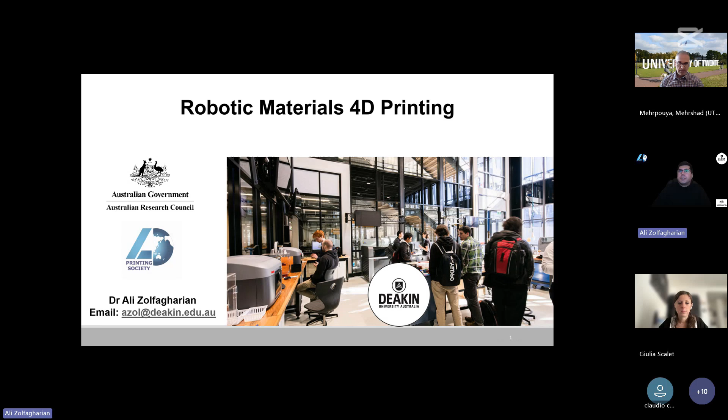In the picture, you can see our additive manufacturing lab. A bit of information about Deakin University, which is located west of Melbourne, with campuses at Warrnambool, further on the western part of Victoria, and also Waterfront in Geelong. We have recently opened our engineering school in Burwood, on the east of Melbourne, all in Victoria State, in southeast Australia.

Let me start with a brief definition of 4D printing. We define 4D printing as additive manufacturing of smart materials which change their shapes, properties, or even color in response to external stimuli such as heat, humidity, electricity, or magnetic field.

Using that, we can save more time, energy, and post-processing, coming up with robots, actuators, or sensors that could be manufactured using additive manufacturing with the intention to be run in one step.

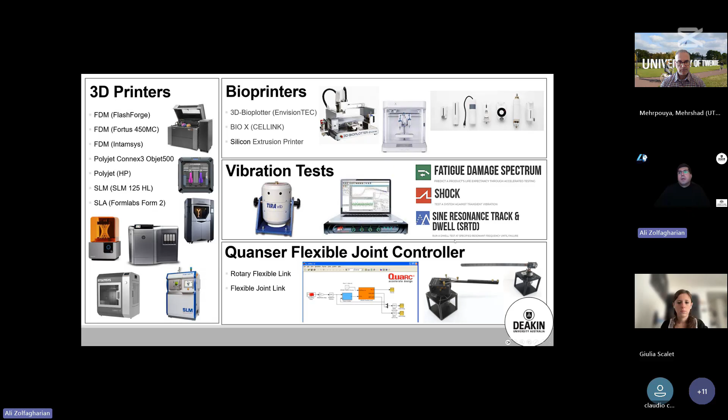In our lab, we have equipment related to 3D printing and bioprinting, and characterization in terms of 4D printing and soft robotics. You can see here a range of printers, mainly for polymers and bioprinting that I work with in my lab, and also equipment for vibration tests, characterization, and soft robotics using the Quanser and MATLAB interfaces.

Not far from the first day that 4D printing was introduced by Skylar Tibbits, the first paper on that was published by Jerry Qi at Georgia University, and also Skylar from MIT with his TED Talk.

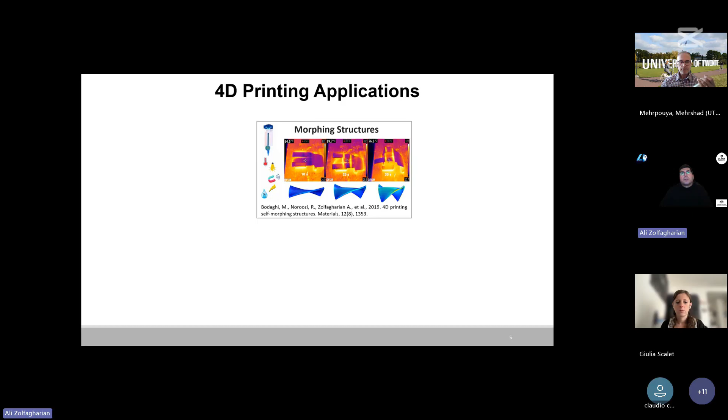In 2016, I started working on 4D printing in our lab with different applications, from morphing structures and structural elements, to applications in sports and medical devices, soft robotics, and very recently vibration absorption and isolation.

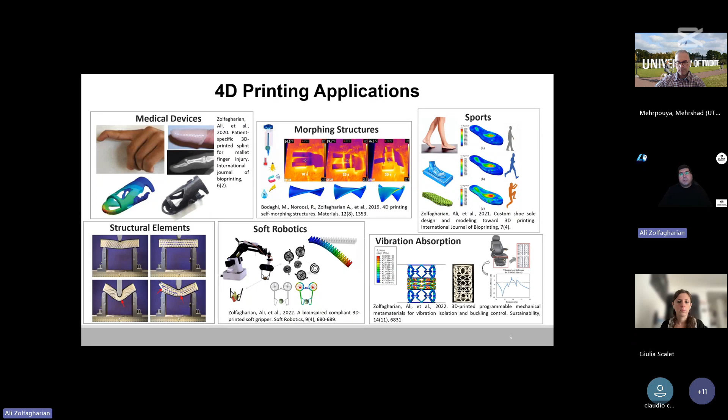From the beginning, with the collaboration of colleagues, we focused on how we can come up with the programming of the shape morphing that could be used for soft robotics and robotic applications using 4D printing.

A range of programming approaches have been introduced. For example, on the right is a pattern-driven 4D printing approach, where drawing or printing different patterns on a pre-strained polystyrene sheet, we could achieve bending and then control the bending using specific 3D printing parameters.

Then we came up with cold programming, where we use printing process parameters like the velocity and temperature of the nozzle and bed to print something, then apply the loading at room temperature or below the glass transition temperature (Tg), and then applying Tg, we could harness some sort of bending.

The most genuine approach we came up with for 4D printing programming is hot programming, where during manufacturing, using the printing process parameters, we could embed the amount of bending or morphing we could harness after printing by applying stimuli such as magnetic field, heat, or electricity to harness the bending.

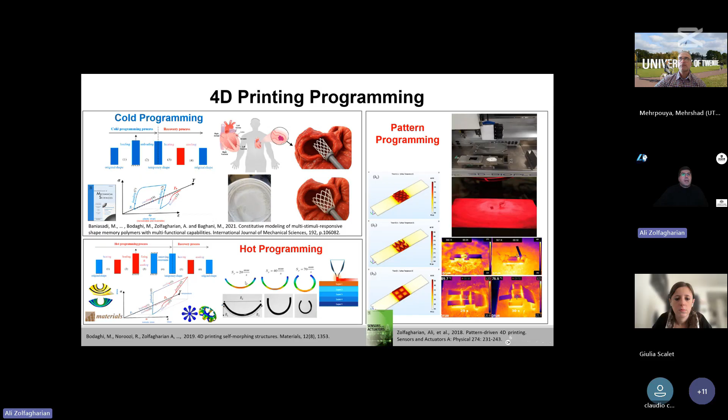For example, on the bottom image, using different velocities of the nozzle, we could come up with functionally graded materials, harnessing different amounts of bending after applying heat.

Coming up with these methods, we could work on different case studies and different projects related to 4D printing in the direction of soft actuators and soft robotics.

Another material that has some benefits for 4D printing is hydrogels, because they are processable and also stimuli responsive. They could be swelled and deswelled, and stimulated with different methods and stimulants like heat, humidity, electricity, and so on.

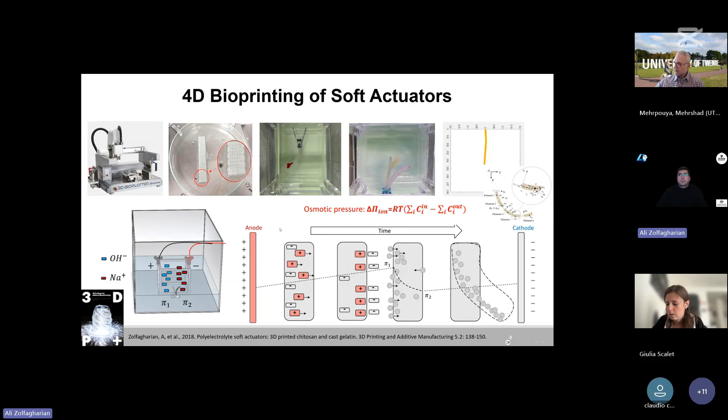We worked on polyelectrolyte hydrogels and developed some actuators based on osmotic pressure and the Donnan effect, where changing the polarity of the electricity changes the direction of actuation and controls the swelling and deswelling. They have some applications in biomedical cell manipulation and also as sensors in aquaculture and so on.

Further, we could come up with more sophisticated types of those actuators with the combination of both bioprinter and commercial FDM. We came up with a parallel robot that has more precise actuation and can carry more payload. We also included some fibers into the hydrogel during printing, and you could see morphing shapes like this saddle shape or this twisting morphing.

All these shapes can be achieved under the same volume of material or actuator using only 3D or 4D printing parameters, by changing the fiber direction either parallel or at different angles. We worked on the modeling of this morphing and showed the effects of fiber direction that could be achieved during 4D printing for hydrogel.

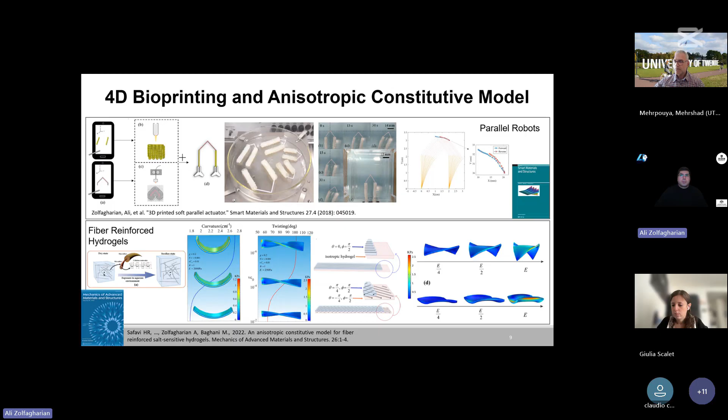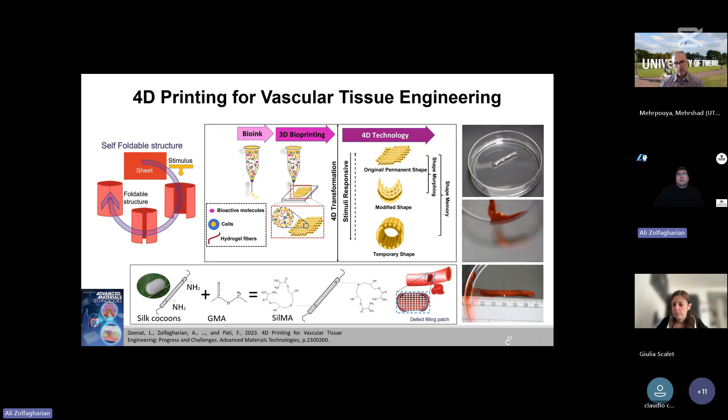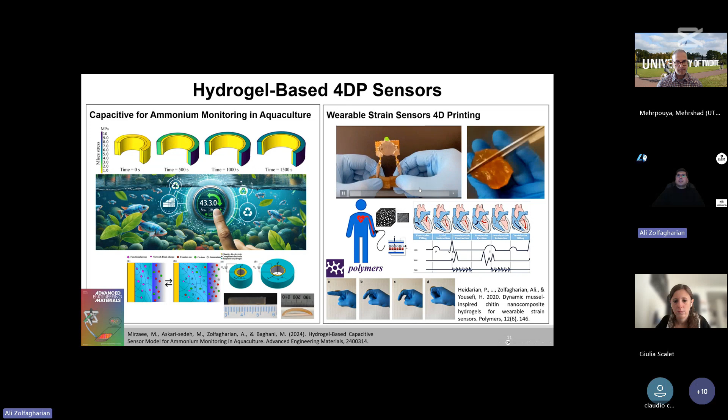We also worked on a wearable strain sensor with self-healing and conductivity, as you could see after cutting into pieces, where the pieces can come back to each other based on the self-healing characteristic of the hydrogels, with still high conductivity to be used as a sensor for biomedical application.

One of my main interests in 4D printing is soft robotics, combining materials and design using additive manufacturing, particularly 4D printing, for developing soft robots in one run.

Again, based on the programming methods I explained earlier, like code programming or shape programming, we succeeded in developing different types of grippers carrying different materials, payloads, and sizes, as you could see here in the soft robotic grippers.

Inspired by nature, we embedded a torsional spring as a hinge into that finger and soft gripper. We also worked on tremor suppression as another project of one of my PhD students, and we succeeded in suppressing vibration in the frequency range relevant to a person with Parkinson's disease. I will talk about that later.

Non-assembly mechanisms were also printed in one run using 3D printing for soft robotic applications.

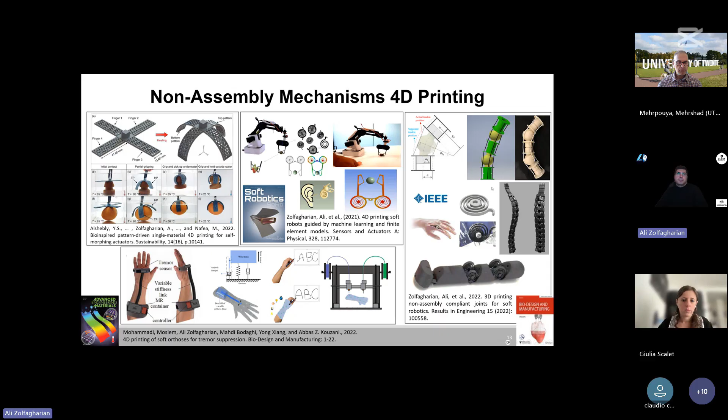Not all materials have the characteristic of being responsive to external stimuli, which makes 4D printing quite challenging. So we came up with the idea of heterogeneous 4D printing, where we brought in other stimuli-responsive materials or actuators like shape memory alloy or carbon fibers as an external part used for transferring heat, so we can use 4D printing programming in integration with those external actuators like shape memory alloy or flexible carbon fiber heaters.

We succeeded in showing their application as a flexible joint in soft robotic applications, for reducing the vibration of the endpoint of this flexible joint, as you can see in the picture, or as a gripper with variable stiffness using shape memory alloy.

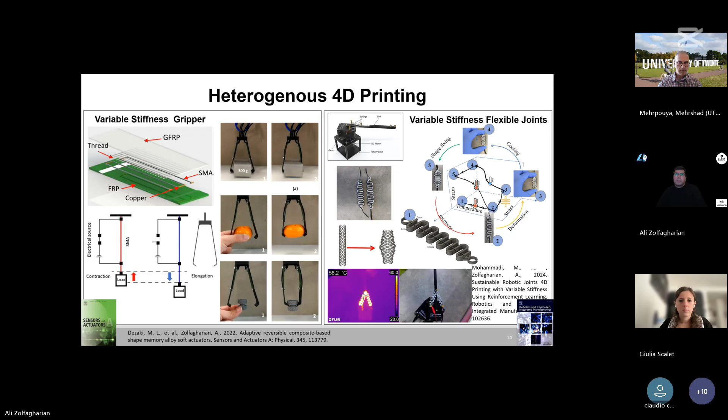Another direction of the 4D printing soft robotics is soft pneumatic actuators. This is one of the most well-known applications of 3D printing, and we could also call it 4D printing, because pressurized air or pneumatic stimuli can be used based on the design of the actuators that you conduct during printing. You can get a different amount of bending and force at the tip point of these actuators.

We have also used the design aspect of additive manufacturing and 3D printing that allows flexibility in the design and individualized design, which is an advantage of 3D printing. We could develop a personalized

spoon that we named Spoon 4PD. The 4PD is for Parkinson's disease patients. Based on measurements you could take from the hand and palm, specific to an individual, you could design a specific spoon relying on tuned mass damping. Tuned mass damping is a very popular direction for reducing vibration applications, and we used that for reducing the vibration at the endpoint of the spoon, based on the design we considered during 3D printing for this specific application for Parkinson's disease patients.

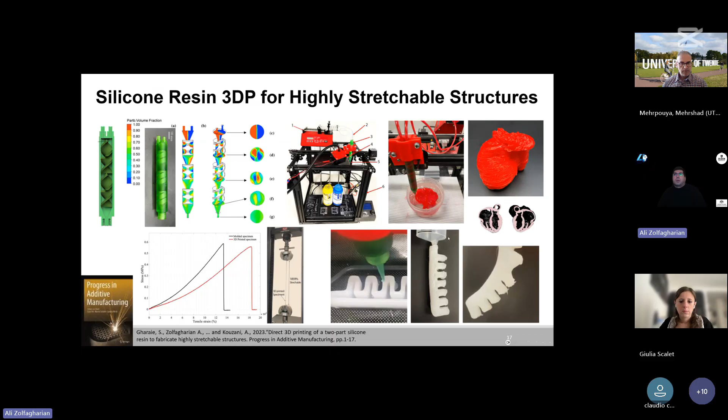We then printed using a syringe pump for that silicone printing, and we could develop soft materials and soft products for actuation, as well as some biomedical applications.

Using that silicone 3D printing, we could work on AI-based 4D printing for human-robot interaction. We developed different silicone modules in different shapes, and embedded sensors like accelerometers at different locations on those products. With different touches between the human and the modules, like slapping or tickling, using AI we could successfully distinguish between different interactions between human and robot.

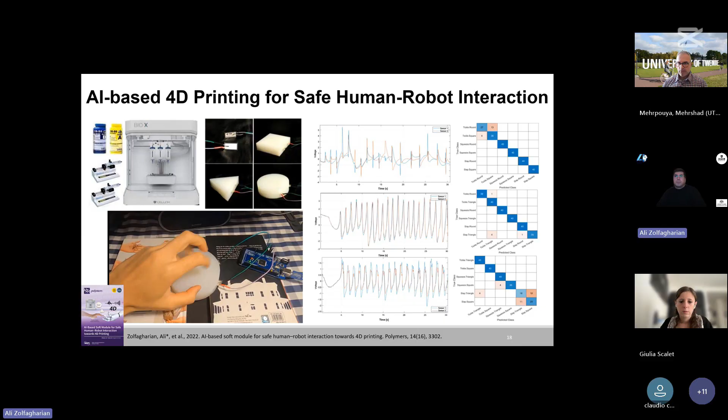Again, leveraging silicone, we mixed the silicone with ethanol, and the mixture of these two leads to some actuation upon heating, because the ethanol reaches its boiling temperature and evaporates, but its bubbles become entrapped in the silicone, leading to swelling after heating up once it reaches the boiling temperature.

So we used this characteristic and added a flexible fiber as a heater into the silicone, and printed that in a rotary printer, as you can see in the top left video. We then used them for vibration reduction, and for changing the stiffness of joints in robotic applications.

Further, we worked on a bistable mechanism inspired by the Venus flytrap plant, using the same material. We also showed the application of that in a parallel robot, as you can see in the top right video, showing how, using some string wrapping around the silicone, we could confine its motion to linear motion after expansion.

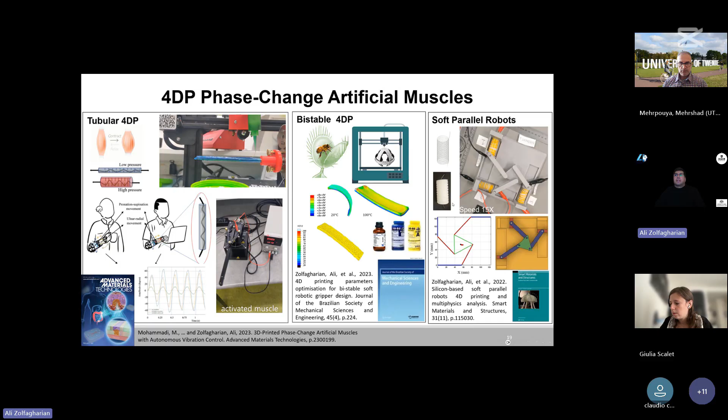Also recently in our lab, we started working on using bistable mechanisms that could be 3D printed, with applications in soft robotics, particularly for vibration. After trialing several designs, we could come up with designs that achieve bistability. One issue here was the boundary conditions, because of defects that occur during 3D printing, so we needed to come up with a very optimized way to 3D print this kind of bistable mechanism.

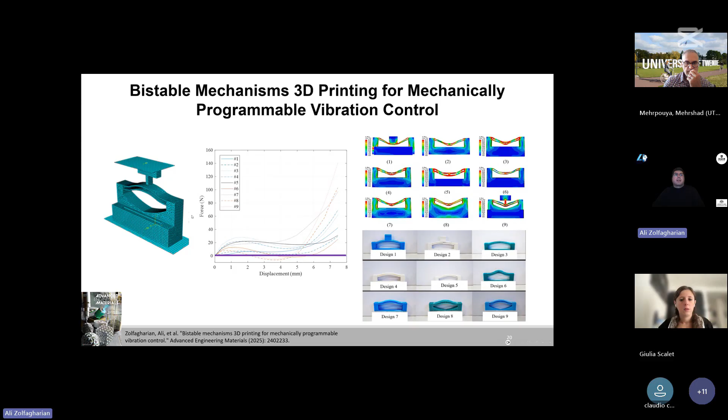A few of these designs achieved the bistability that was needed. We then showed the application of this bistability by stacking these bistable mechanisms into each other. As you can see, we could achieve the displacement that was needed, and by changing this displacement manually, it was not yet like a 4D system at this stage, but it has potential for 4D printing as a future direction.

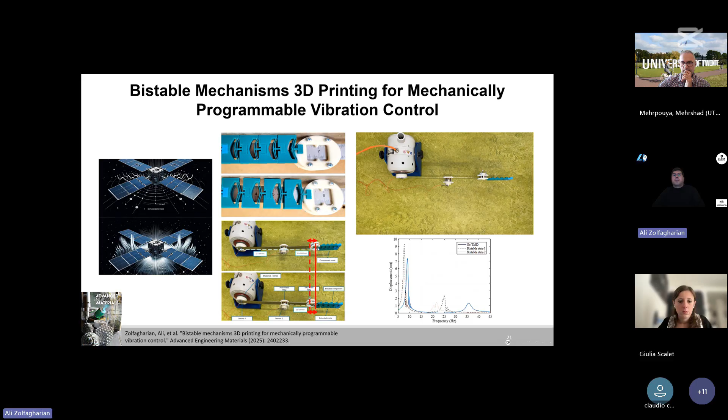The proof of concept was to show how we can reduce the amount of vibration by changing the location of the mass in some flexible structure, which could be a potential application of 4D printing.

We also worked with another PhD student on developing flexible materials that we named metamaterials, because we could achieve the desired force displacement by making a lattice of those materials, again inspired by nature, from this grasshopper type of mechanism we developed.

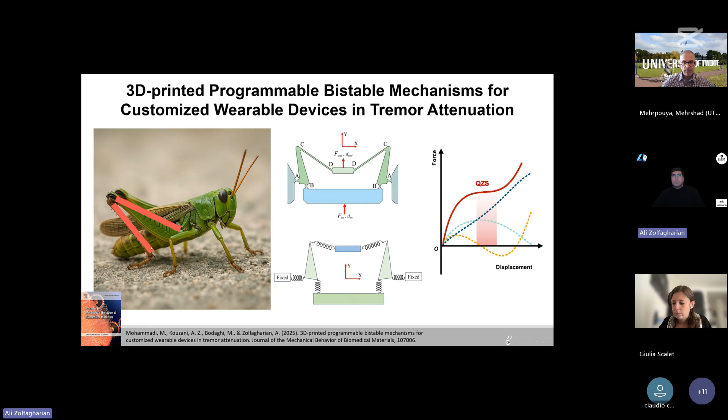And then using the lumped parameter approach, we were able to print and then model that.

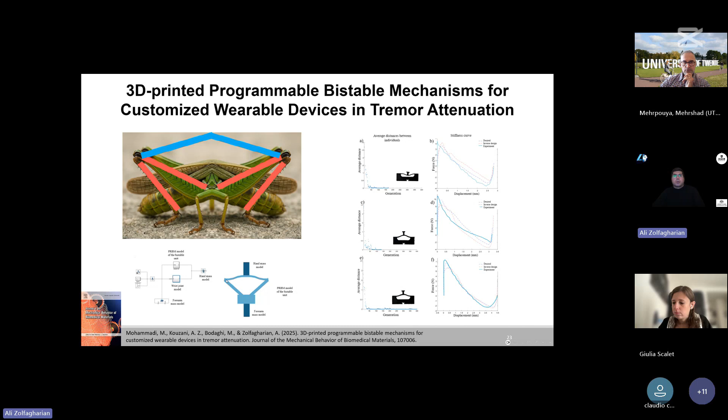Our main contribution to this work was developing this bistable mechanism in MATLAB based on pseudo-rigid body modeling, and then connecting those beam models and using springs to come up with this compliant mechanism.

And then we could use AI, artificial intelligence, particularly machine learning and surrogate neural networks, in order to estimate the behavior of the mechanism with changing design, using thousands or millions of data points we could achieve after validation with the experimental results.

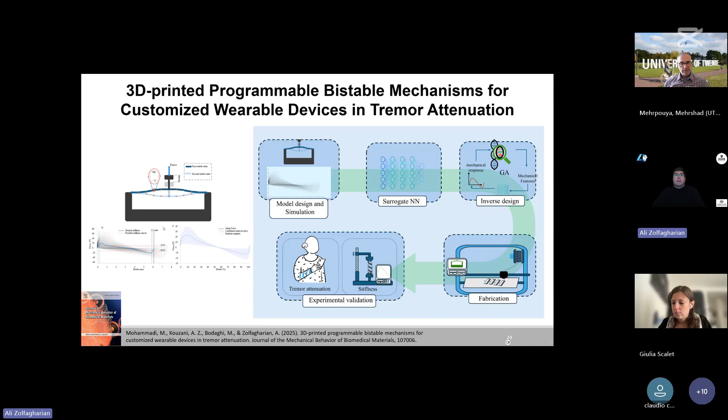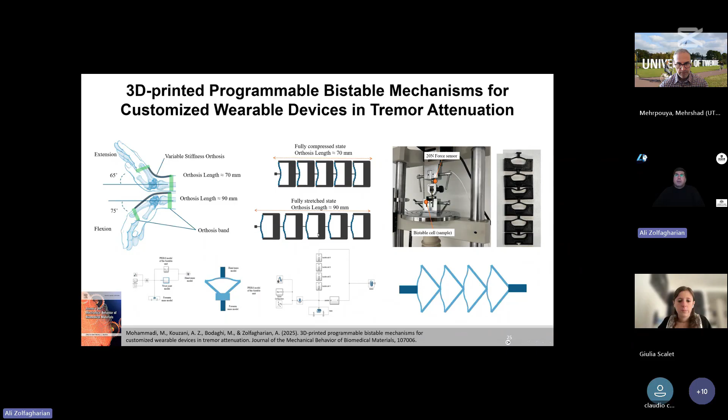That desirable stiffness then showed application in terms of vibration reduction, as you can see here in a phantom model of the hand.

We applied those bistable mechanisms, which were totally 3D printed, and we could achieve different amounts of stiffness by changing that bistability.

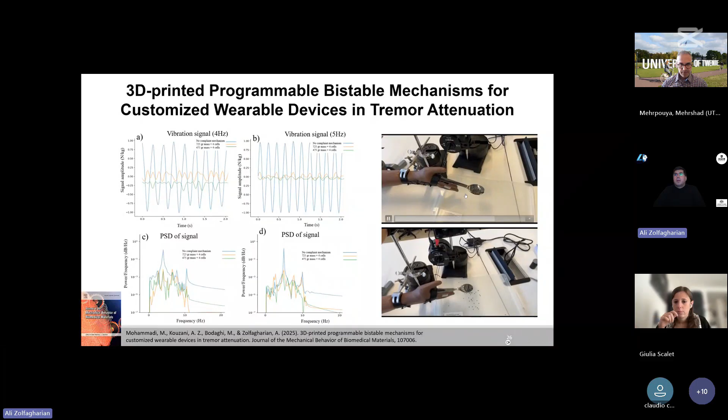You can see the difference: at the top, those spheres all remain in the spoon, but at the bottom, with changing stiffness, they are dropping, demonstrating the application of tremor suppression in Parkinson's disease patients.

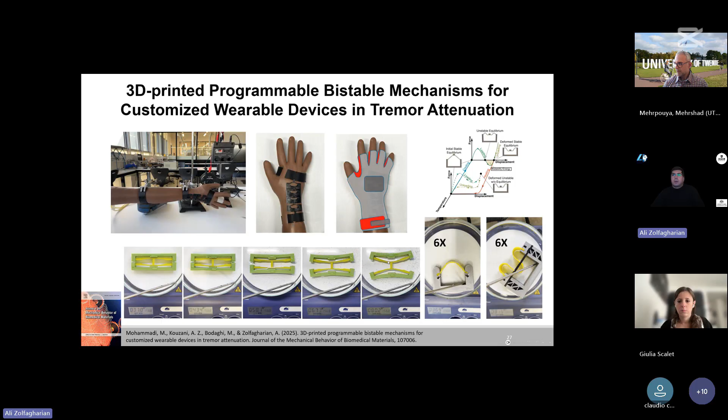We are also working on metamaterials inverse design using PENN, which stands for physically enhanced neural network. So we use physical simulation and models as a constraint or loss factor in the neural network or machine learning.

Using that, we have the advantage of reducing the amount of data needed for training the neural network, and we also capture the nonlinearity involved in the physical rules.

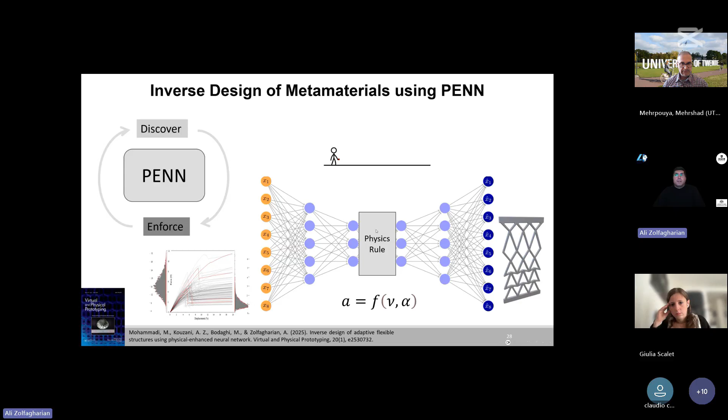And then we use some optimization in order to make a stochastic or searching algorithm for covering lots of possible scenarios for the force displacement.

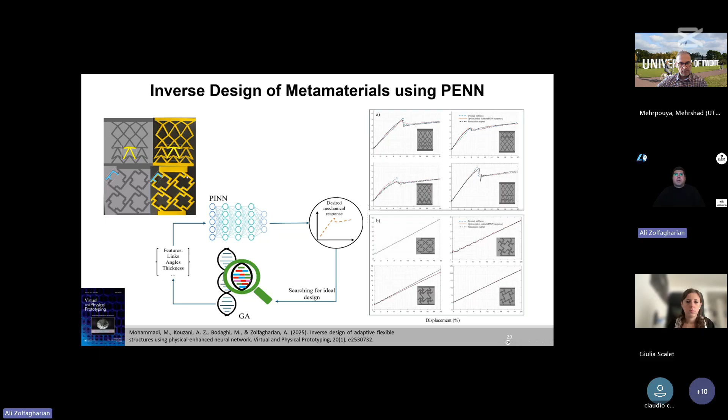And we could come up with several scenarios where we wanted the desired behavior of our metamaterials.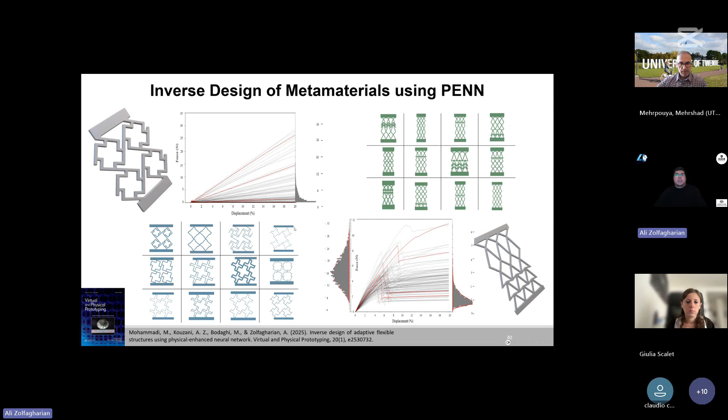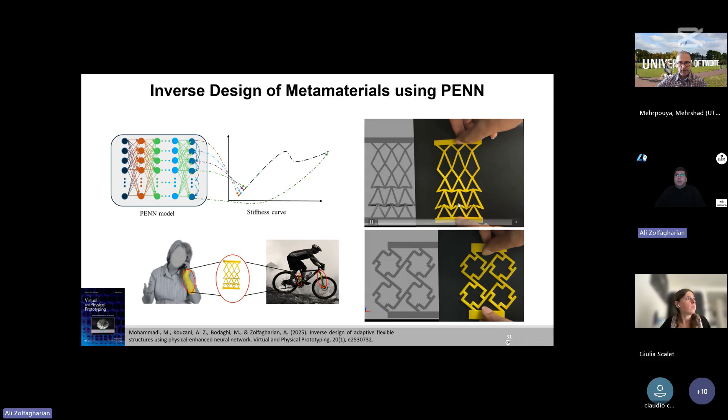As you can see here, from the inverse design, we input into our algorithm the desired performance or stiffness that we want, and we could come up with the final design based on the different stiffness and force displacement behavior that could be achieved. You can see that here in the video.

That was almost all that I had in terms of research.

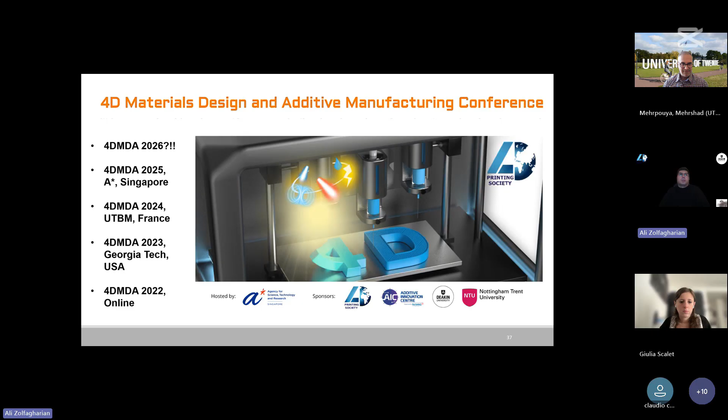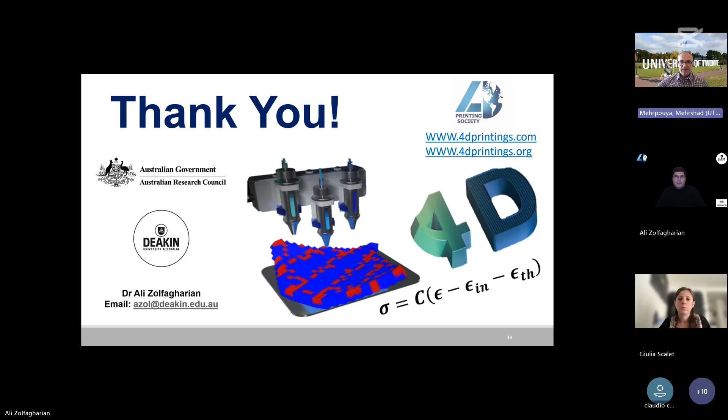Thank you very much, Ali. It was very interesting and, let's say, on time.

There are a couple of questions in the chat. I can read them for you. The first question from Maysam asks: what is the stiffness range of as-printed samples? How much do the structural defects affect performance?

Thanks, definitely. I don't remember the stiffness range, sorry for that, but I can come back to you or refer to the papers published there. But for the defects, I can assure you that they are very critical factors.

I think the question was related to bistability. For the bistable mechanism, there are the boundary condition and the force, and these are two very important things. The boundary condition will be directly affected by defects that could happen during printing, but this could be optimized.

Now we have also made progress in terms of the printer and materials we have. Compared to what we had like 3 years ago, now, for example, the Bambu printers coming are quite fast and quite good in terms of printing. So this all helps us move toward better results in terms of the bistability.

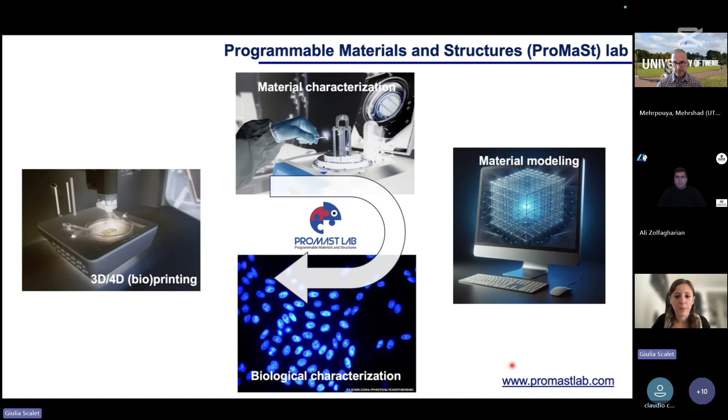So today I want to focus on programmable materials. As a brief introduction, what are programmable materials? They are materials that, as the name suggests, are really dynamic. They can be programmed in order to adapt to different situations and application needs. This is a very simple example of a thin sample that can adapt its form, its shape, to match different types of surfaces.

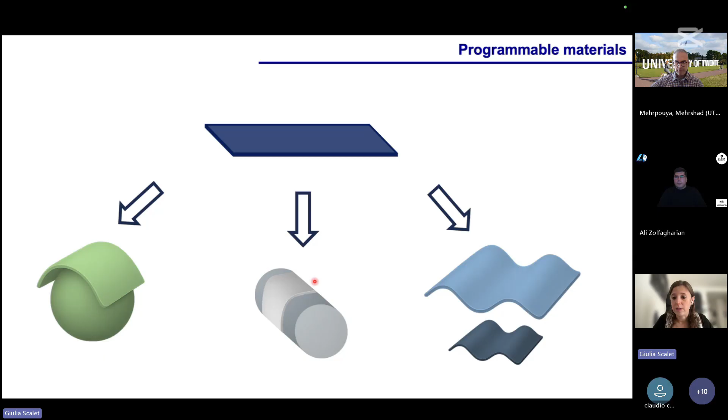Obviously this is just an example, but you can open your mind and program materials in order to adapt different physical properties and functionalities. In the literature you can find a lot of examples on shape programming, stiffness, Poisson ratio, color, adhesion properties. There is a lot of work in this sense, and obviously it depends on your needs.

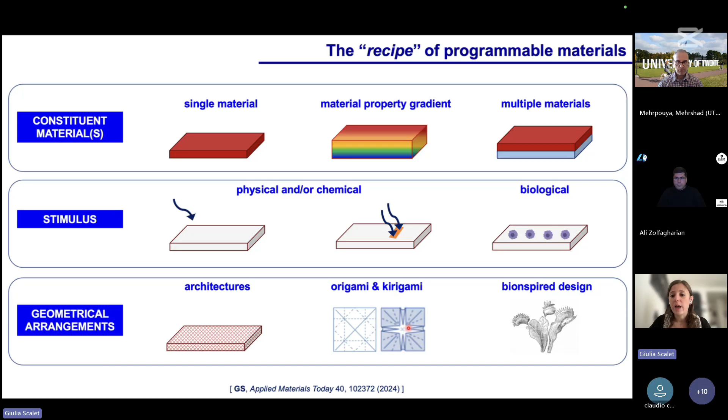To design a programmable material, there is a lot of work behind it. There are three main ingredients you can use to make a material programmable. You can play with the base materials, which can be different; the stimulus, so its application or the type of stimulus, which is not only mechanical but can also be thermal, magnetic, and so on; and also the architecture. You can play on specific geometries, such as the classical examples of metamaterials, origami, kirigami, or bio-inspired design.

So you have a lot of examples, and today I'm going to talk about a programmable system made of shape memory polymers. Shape memory polymers, as the name suggests, are soft materials able to remember their initial shape. Almost all polymers feature the so-called one-way shape memory effect. This is a very simple effect that can be schematically represented in this way: you start from an initial permanent shape, you apply a specific programming history to fix a temporary shape, and after the application of an external stimulus, you can recover the initial shape.

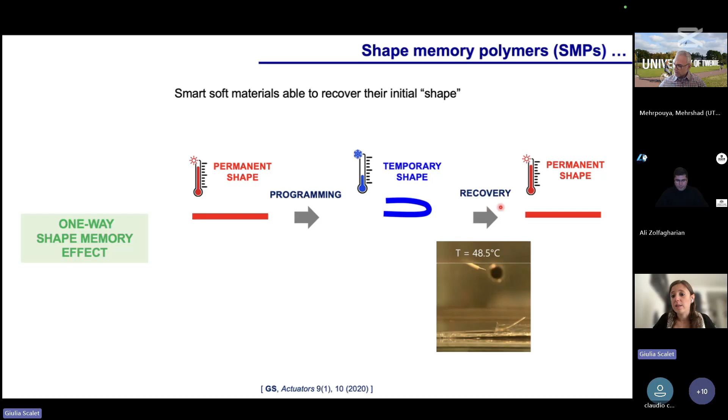As you can see in this picture, the thermal stimulus is the most used one. The only thing is that, as the name suggests, this is one-way, so you cannot go back to the temporary shape once the recovery is completed. This is why researchers work on other types of shape memory polymers.

There are polymers that can feature the multiple shape memory effect, where essentially the idea is very similar, but in this case you have more than one programming step where you can fix a different temporary shape, and after that the recovery is sequential. So you can program the different shapes to have programmable shape changes. Again, this is very important to achieve programmability, but again this is one-way. So once you have recovered the final shape, you cannot go back to the temporary shape, but you have to start again all the programming steps.

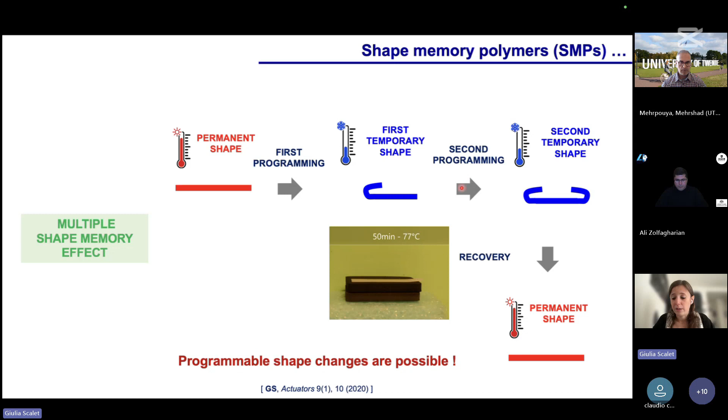This is why we are working a lot on the two-way shape memory effect. The idea here is to play with the cooling and heating cycle in order to move from one shape to another in a reversible way. So we have the additional feature of programmability and reversibility.

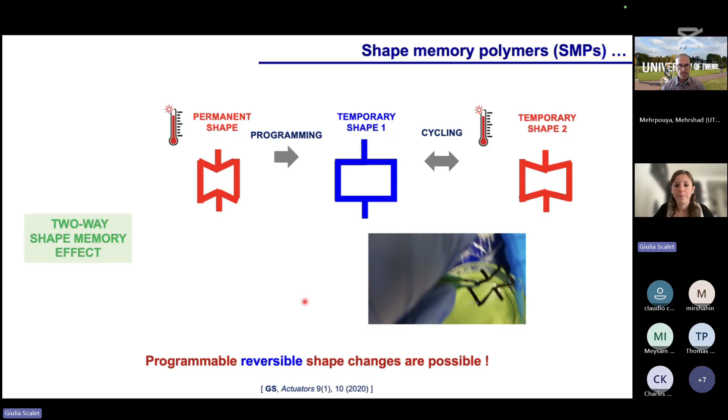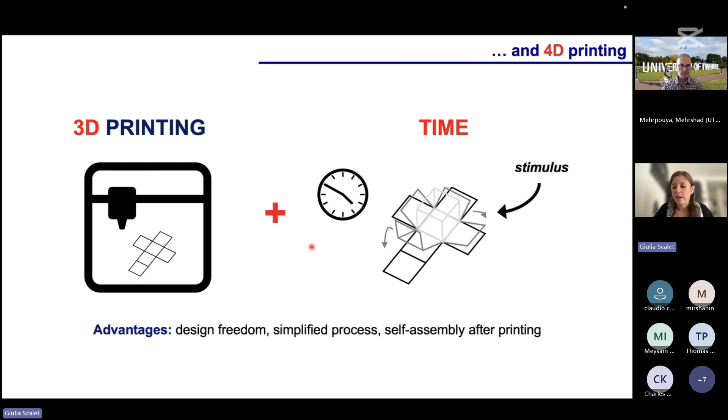These effects are very promising because you can couple the shape memory polymers with 4D printing approaches. I will not go into the detail and advantages of 4D printing, but this is very advantageous for applications. In fact, there are a lot of applications you can find in the current literature, and we also had an additional application that is very, very challenging: the use of this material for cancer engineering.

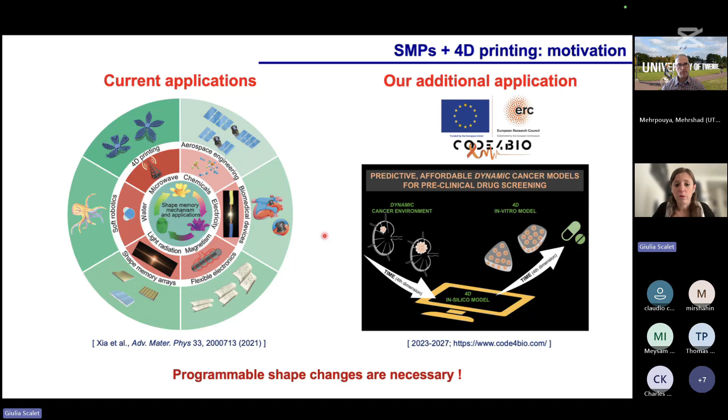We use this material as a scaffold in order to manufacture some dynamic in vitro models that can, in a simple way, mimic the real dynamicity and programmability of the tumor microenvironment. For all of these applications, programmability is essential. This is why we decided to work on this type of feature.

There are a lot of challenges behind this—experimental, from the practical point of view, theoretical, and numerical—because we have to find essentially the optimal polymer for our application, and this polymer is highly nonlinear, with a lot of phenomena behind to tune its behavior.

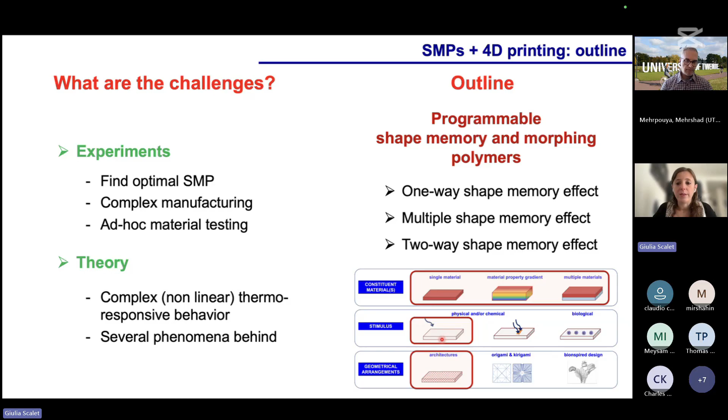In particular, today I want to talk about our recent results, focusing on the one-way, multiple-way, and two-way shape memory effects in order to achieve a programmable shape memory system. I will show you some results concerning these key ingredients, highlighted in the red boxes, in order to achieve programmability. So let's start just from the beginning, with a few words about shape memory polymers.

Again, the shape memory effect, as you have already understood, is the result of this programming history plus the recovery ability. Obviously, the architecture of the polymer plays a fundamental role because it can be synthesized to tune the response of the polymer based on your needs.

Essentially, we have a domain that is responsible for this effect, where there is a transition temperature—this can be a melting or a glass transition temperature—which is responsible for this behavior, and a net point, which can be physical or chemical cross-link, that is responsible for this shape memory fixity and recovery.

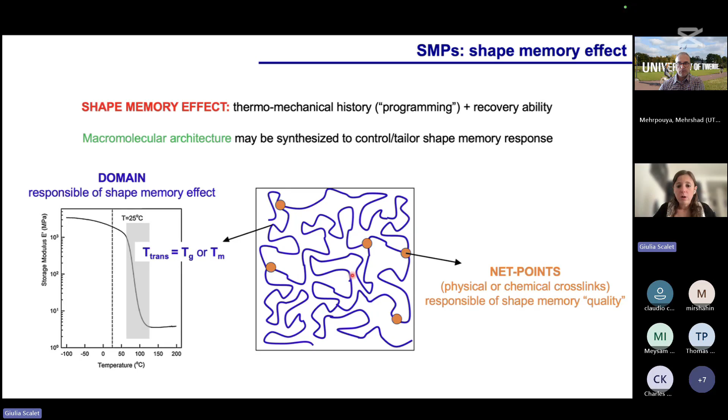So in particular, we have worked on different types of polymers. Let's start from those based on the glass transition temperature, and let's see how to obtain programmable shape changes using the one-way shape memory effect.

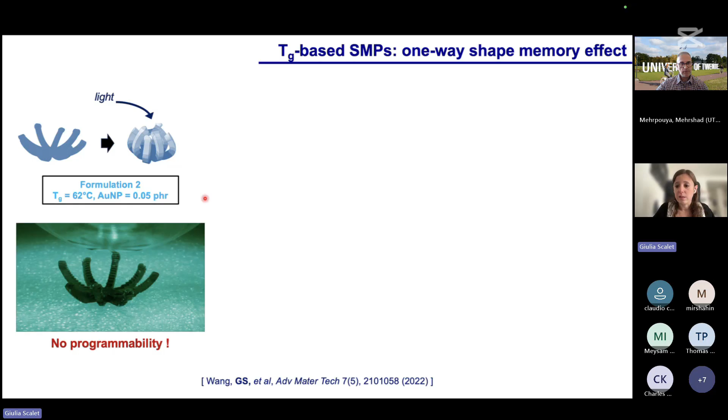As you have already understood, the basic one-way shape memory effect is not suitable for programmability. You can see this very simple example we worked on some years ago. You print this structure, fix this deformed temporary shape, and upon light irradiation, because the material is composed of gold nanoparticles, you can obtain through indirect heating the initial shape. So this is a very simple example, but it is not programmable. This is why we worked on programmability.

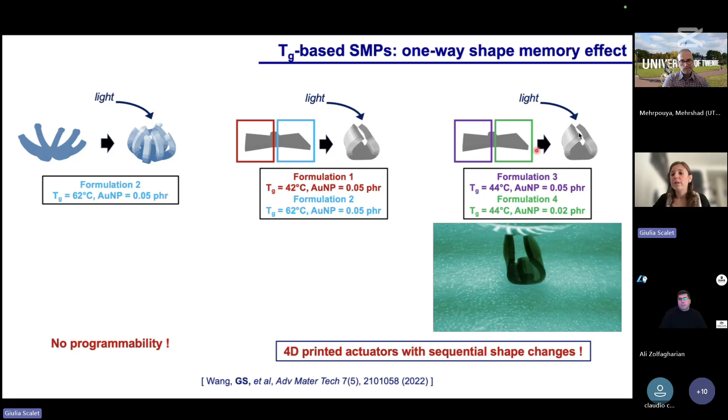You can also play with different polymers but with the same chemical composition, so the same glass transition temperature, but use a different content of gold nanoparticles in order to achieve differential heating upon light irradiation. This allows you to achieve sequential shape changes and sequential shape recovery upon light irradiation. So you have different approaches that you can exploit in order to achieve programmability also with the one-way shape memory effect. You can model this.

I'm a structural mechanics researcher, so this is my starting point from my PhD. We have worked a lot on constitutive modeling, and you can also propose constitutive models, in particular those based on phase transition, to describe and support this design stage.

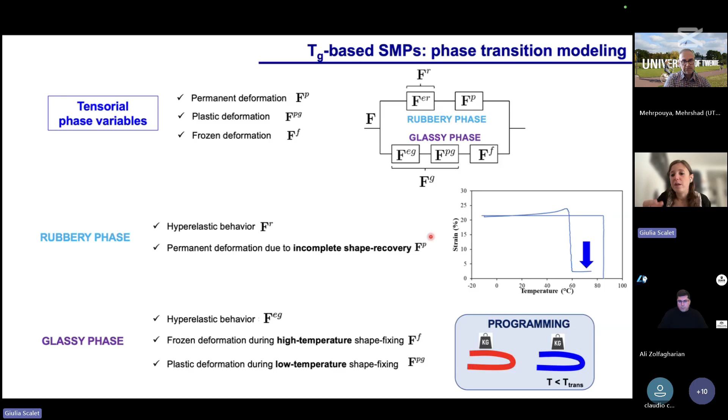The idea of this approach is to introduce particular specific phase variables, scalar or also tensorial, in order to describe all the inelastic effects and phases within the material, to describe the final shape memory behavior of the structure. I will not enter into detail of all the equations. In this case, we have a rubbery and a glassy phase, since the polymer is based on a glass transition, and you can introduce a specific tensorial phase variable to describe all the inelastic deformation associated with the different shape memory effects. You can obtain a model, in this case, that is able to describe different effects, not only the basic one, but also an incomplete shape memory behavior.

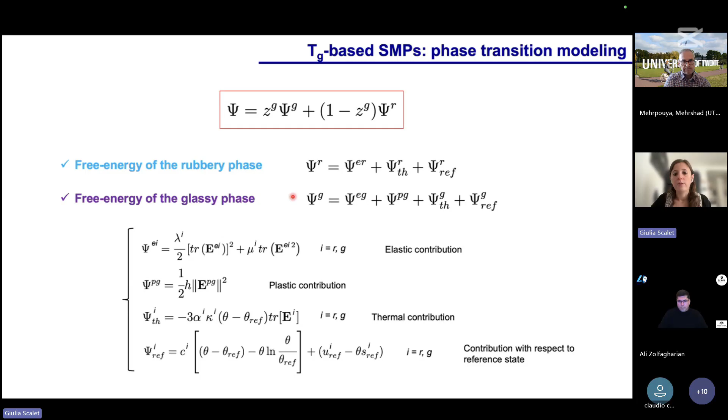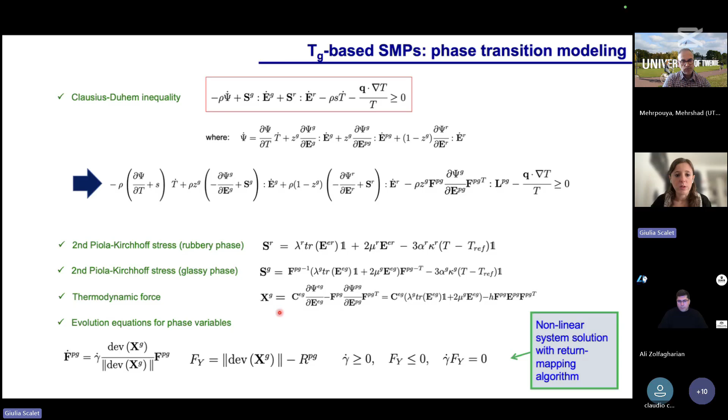So you can define the Helmholtz free energy as classically done in the literature with a mixture rule, and you can derive, in a thermodynamically consistent framework, all the constitutive equations. You can implement this into a numerical code. We did it in Abaqus software, and you can support the prediction of the behavior of this structure by numerical simulation, and the comparison shows very good results.

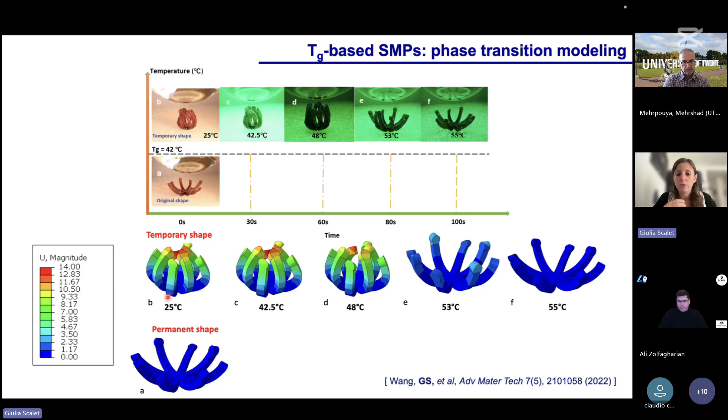The main problem we face with, for example, this structure, but also other structures, is that you start from a permanent shape and have to deform the structure to a temporary shape. So you have to apply, first of all, a mechanical deformation under isothermal condition at the beginning. This is the first step of the programming step. This is challenging from the numerical point of view because you don't know a priori the boundary condition to apply in order to get the right target temporary shape.

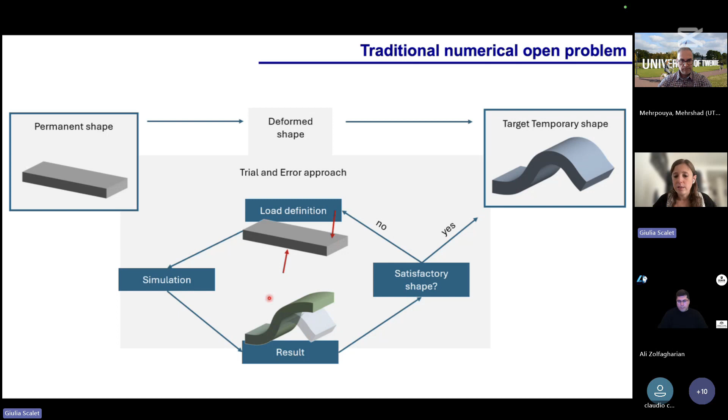So it is essentially a sort of trial and error approach for the numerical simulation, because you start to apply a load, a boundary condition value, but at the end it could not be the right one, so you have to change it a lot. This is especially true for very complex structures.

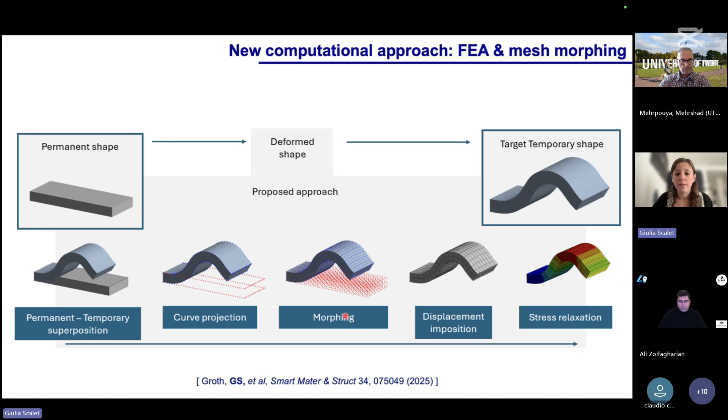This is why we try to support this step by coupling finite element simulation, with our constitutive model, with mesh morphing. Mesh morphing helps us skip this trial and error approach and achieve the target temporary shape, which should usually be known based on imaging techniques, or if you have a target application, you know your target shape, and you can apply this mesh morphing technique to avoid the trial and error approach based on finite elements.

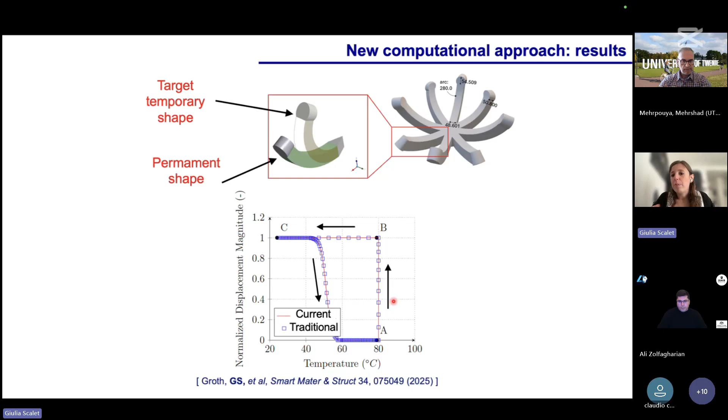And we validated this also for the case of this flower, and the results show good accuracy compared to the traditional approach.

And now let's go to the second part. Let's try to understand how to make a programmable structure using the multiple shape memory effect.

We did it using a commercial polymer. I'm honest, we were very lucky because we found this multiple shape memory effect in a commercial resin for the 3D printer by Formlabs, the stereolithography one. This resin is very advantageous because it has a broad glass transition temperature that is a prerequisite for the so-called temperature memory effect.

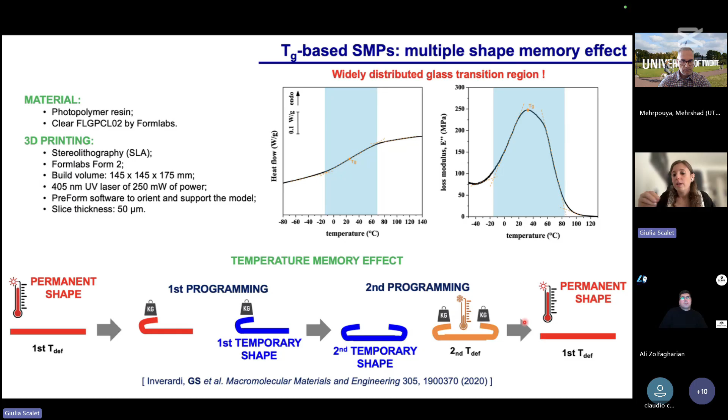What is this effect? It's very similar to the multiple shape memory effect. So we have a permanent shape, different programming steps, and this recovery that is sequential, but the main important feature is that the material remembers the deformation temperature, so the temperature at which it was programmed, and this recovery takes place essentially at this deformation temperature. And so we play with this material.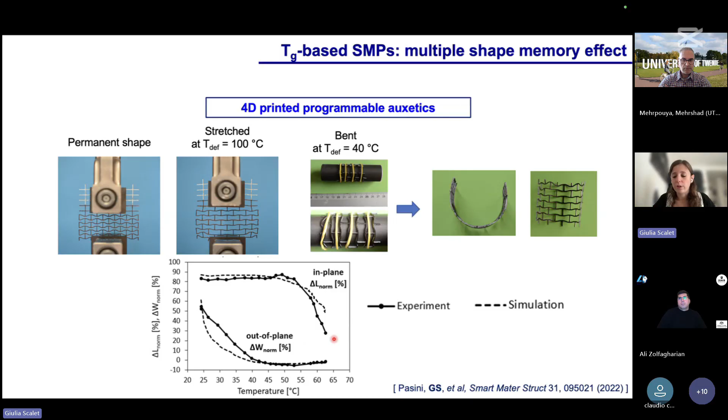We coupled it also with some architecture, such as these programmable auxetics. So we were able to achieve different sequential out-of-plane and in-plane shape changes using this resin, and this allows us to achieve programmable shape changes based on our need. We also verified through numerical simulation, in this case with some simple rheological model, the classical generalized Maxwell one, in order to support this design step.

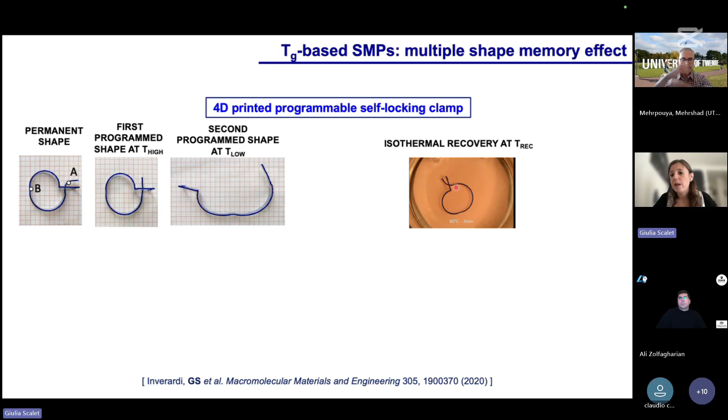And you can also play with this effect in order to achieve a more complex structure. This is a very simple example of a self-locking clamp. So essentially, this is the printed one. This is the deformed shape during the first programming step. This is the second shape at the second programming step. And finally, we can recover sequentially this deformed shape up to the initial one in a sequential way. So this allows the clamp to close. And we support this experiment also with numerical simulation.

So let's go to the last part of this talk, that is on two-way memory effect. In particular, this is a typical feature of polymers based on the melting transition temperature. This is the main activity we are now conducting, and it's focusing on multi-phase semicrystalline networks. These are a specific type of material that are able to feature this kind of effect.

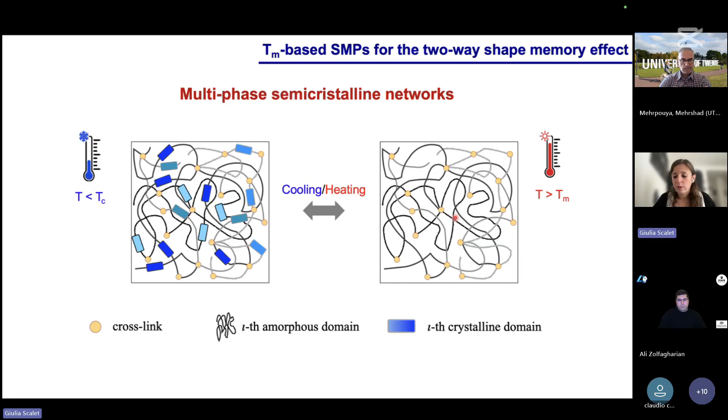And essentially, in general, this material is composed of one or more polymers. Each polymer has its own crystalline and amorphous domain, and so it has its own crystallization temperature and melting temperature, and you can pass from one state to another by cooling and heating cycles. And this is essential in order to activate this two-way memory effect.

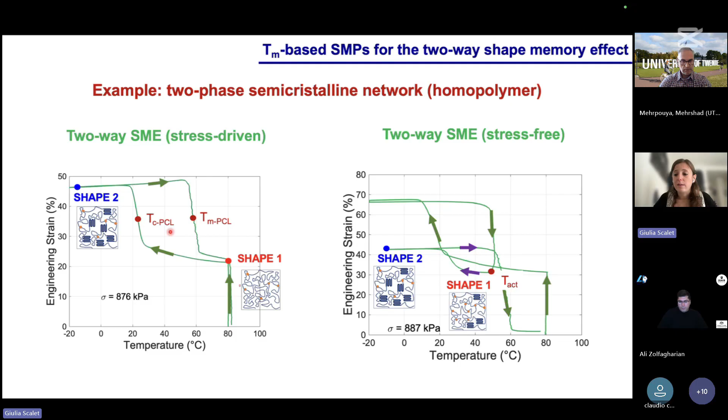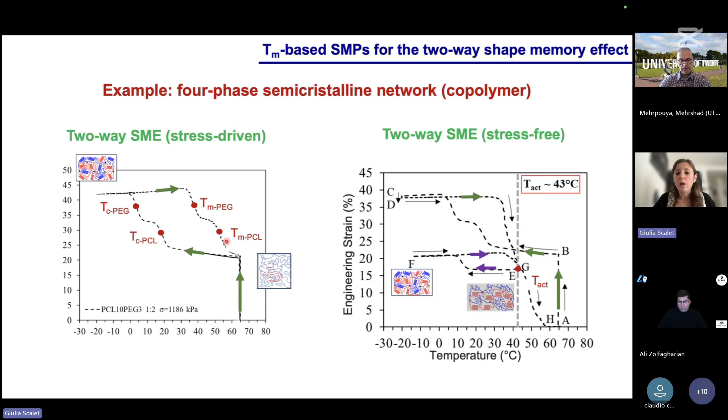And the same happens if we consider, for example, a network made of two copolymers. It's the same thing, but we have more polymers and so more crystallization and more melting temperatures in order to achieve also reversible but also sequential shape changes.

We printed for the first time these materials with an extrusion-based approach. I will not enter into the detail of the chemistry of the material. This is for a PCL-based semicrystalline network. So it is just one polymer, but this technique can be extended also to other types of networks.

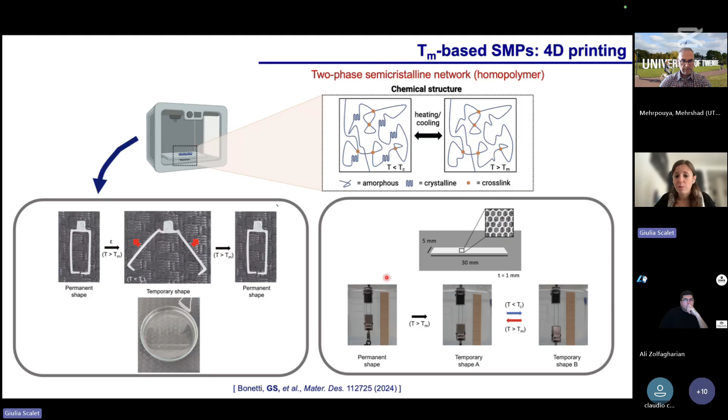And we use extrusion-based printing with UV cross-linking during printing. And we were able to manufacture different types of actuators that are based on the one-way memory effect and two-way memory effect with different designs.

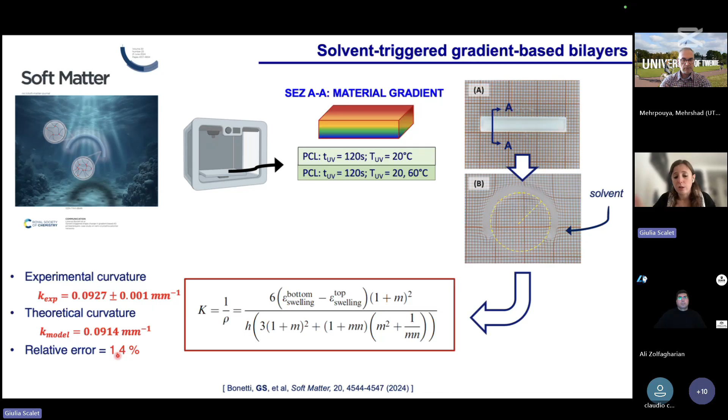So this technique was also very interesting because it allowed us to obtain self-folding structures upon immersion in solvent, thanks to the material gradient within the thickness. In particular, we use again this network, and we print different layers of this material using different cross-linking parameters. This allows us to obtain a material gradient along the thickness that bends upon immersion in the solvent. And this bending can also be supported with the classical, very easy beam theory, starting from the Timoshenko theory, which shows essentially good results in terms of accuracy.

Finally, let's just focus also on the modeling. This is a very important part because these multi-phase crystalline networks are not modeled in the literature. So we propose this first model that allows us to take into account all the possible conditions, so different polymers within this network with different inelastic deformation contributions, and that are responsible for this two-way memory effect under both applied stress and stress-free conditions.

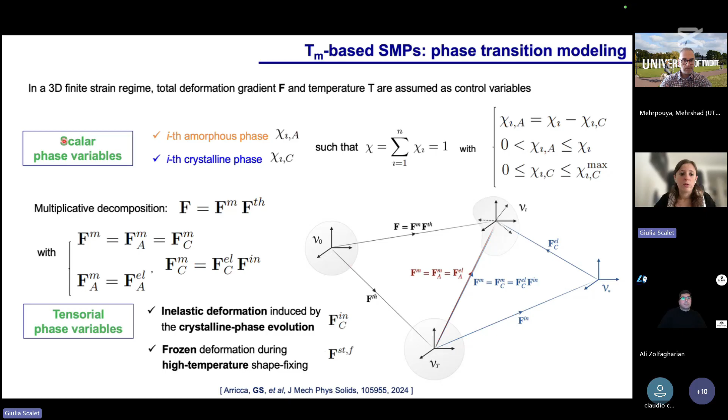So again, we introduce phase variable, scalar and tensorial, and we derive again, as I described before, all the constitutive equation evolution law for the phase variable, in particular using the experimental evidence we observe. So it is a purely phenomenological model.

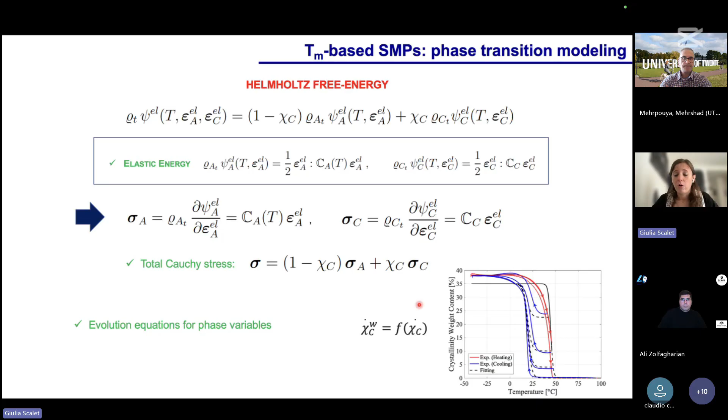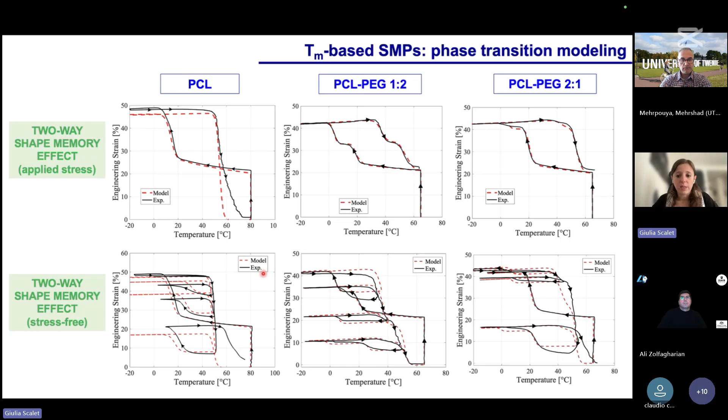And the results are very good in the sense that we validated the model for different types of networks, both homopolymers and copolymer networks, also for different ratios between the polymers. So the model is able to catch well, despite this very complex behavior, the material's shape memory performance.

So let me conclude this talk. I have shown you different types of approaches in order to achieve a shape memory system with programmable capabilities, in particular exploiting different types of shape memory effect. So essentially for the one-way effect, this is not possible, but you can play with different polymers within the same structure in order to achieve a programmable behavior. But again, it is not reversible.

And this effect is mostly used for biomedical, pharmaceutical applications. Multiple shape memory effect is very useful to achieve programmable shape changes, but again it is not reversible. And the two-way shape memory effect is able to achieve, with copolymers or more polymers, this reversibility and programmable shape changes.

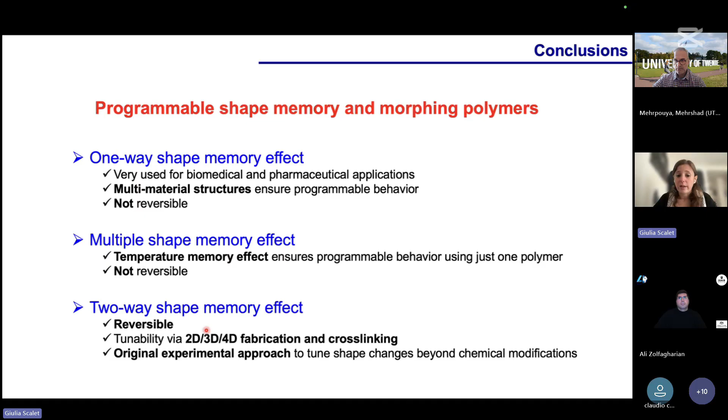So we have worked a lot. We have still some work that we will publish in the near future about also tuning these material properties, going beyond the classical chemical composition.